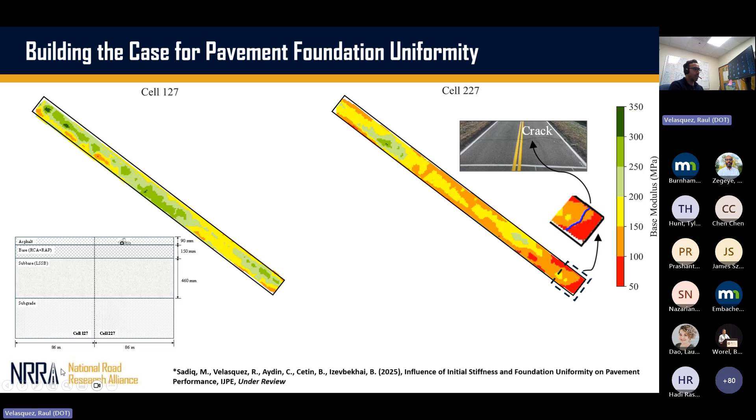So we're going to keep connecting the dots. We're going to keep monitoring these cells. Fortunately, thanks to MnROAD operations, we have consistently measured when we can. We have been mapping the foundations of all the cells with the help of Ingios, with the help of UTEP with Soheil. We have been collaborating with some of our members on this effort. So I just want to show you why this topic is important. And with that, I'm going to give the floor to either Tom Yu or David White to talk about their solicitation in this pooled fund.

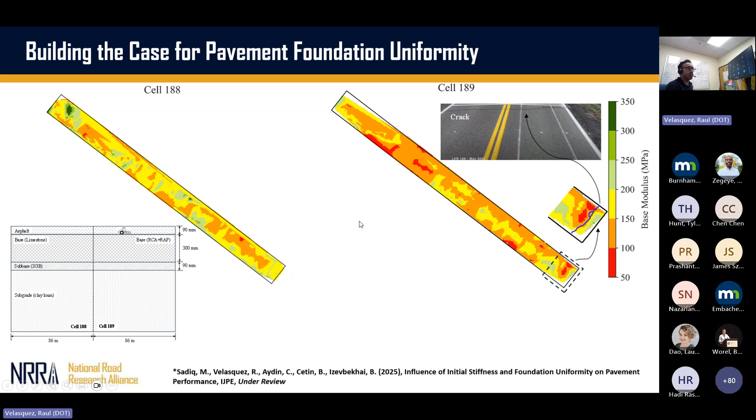Dave, are you on the line? Good morning. I am. Let's see, is Tom on? I didn't see him, so yeah. Okay. I have the slides for him. If you want, I can navigate the slides. Perfect. So I'm gonna show it here. All right. Okay, great. Thank you.

I'll walk through these slides on the proposed pooled fund, engineering the foundation layers for long life, low carbon pavement systems. And what a great background picture to warm us up this time of the year. I'm not sure the story behind that, but that comes from Tom. Okay, thank you. The solicitation has been posted. I'll go ahead and put that in the chat. The champion for this is Chris Brakke with Iowa DOT.

And the manifestation of this really comes from 3 years of workshops at TRB and the work at MnROAD and other agencies that are focused on pavement foundation construction. The objectives are to demonstrate intelligent construction technology for ensuring quality of pavement foundation construction with 100% modulus verification,

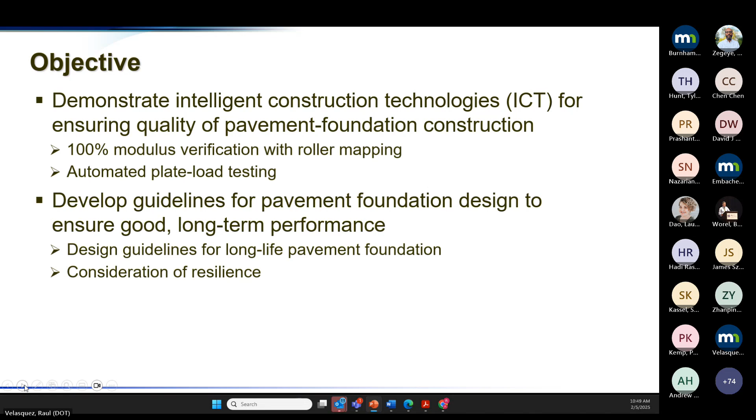The proposed project activities involve technology demonstration from demonstration projects using 100% mapping and in situ tests for validation. Technical support will be provided for the pilot project. So it's envisioned that each participating state would have the opportunity to build a section of roadway as part of the demonstration. Establish processes for quality assurance and verification, including draft specifications, and then develop guidelines for pavement foundation design.

The last 3 years at TRB workshops have been an important discussion where new tools are needed to design pavement foundations to meet pavement design requirements. So establish best practices. And if you've heard Tom talk about this study, deterioration, durability over time is very important to him as part of the project. And it's envisioned geotextiles and different types of stabilization would be an important part of the design element. And then addressing resiliency.

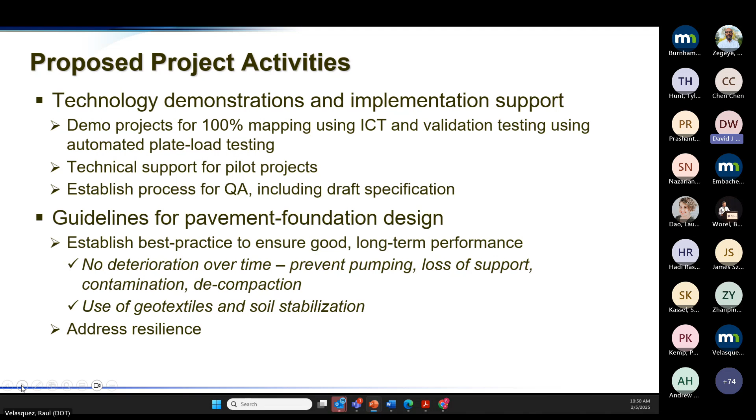The proposed study is 5 years, anticipating up to 3 pilot projects per year, and they're seeking 10 state highway authorities for commitments. The funding level is $30,000 per year for 5 years, starting in 2026. And Tom can speak more to the commitment that he's working on from the FHWA side.

All right, just going back to the study objectives, Tom mentioned that environmental sustainability and reducing the carbon footprint from concrete mixtures was the primary motivation behind this project. And even if you look at the PCA's 2050 roadmap, you will see that alternative cements are one strategy that's been proposed in the pathway to net zero, right? So this project is essentially doing that.

And the objectives of the project were to determine the characteristics that we need to be considering while selecting and placing these materials. What do we need to be thinking about when designing these materials? And more importantly, when producing and placing these materials in the field, what are some of the key aspects to consider? And a lot of these materials are unique.

So if you look at an alternative cement, it's no different from any other cementitious material that you would use, but as defined in the ACI standard, it is an inorganic cement that can be used for either a partial replacement or even a complete replacement of Portland cement in your mixtures. Right? And specifically, these cements are not necessarily covered by applicable specifications or standards that are in place for Portland or blended cement. So those are the materials we're looking at.

So as I mentioned earlier, quantifying environmental impacts, looking at the carbon footprints and comparing that to traditional paving mixtures, that was a big component of the study. And more importantly, we want these materials to perform either equivalent or even exhibit better performance to the materials that we've been traditionally using. So performance is central to it. That's why we have a long-term monitoring aspect in this particular study.

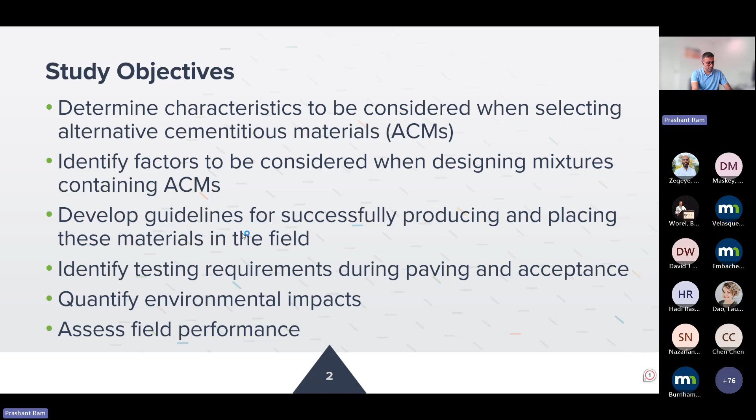So looking at the work tasks, we had 9 original work tasks that were defined as a part of this project. The first initial task was to just conduct a literature review on the different types of alternative cements out there. And then task 2 was mostly construction testing analysis. A lot of testing was performed in the laboratory to test these mixtures, and all the results of those tests have been documented, and those reports should be available on the project webpage on the MnROAD site if you search for it. And then we looked at constructability evaluation, right? How feasible is it to use these materials on a large scale?

So one of the requirements of this particular project was that we should not need the use of any specialized construction equipment. We needed to use the slip form paver and also all other equipment that have been traditionally used with slip form concrete paving. So no modifications were performed to the production operation and also the paving operations.

And then tasks 4, 5, and 6 mainly deal with the performance update after year 1. What did we find, not just from visual inspections, but also from the testing that was conducted at MnROAD and also the data that was collected from the embedded sensors. And task 5 and 6, the same thing for years 2 and 3. And task 7 is looking at the sustainability evaluation. I'll talk about that briefly, but that's something that is underway, and that's in the next steps.

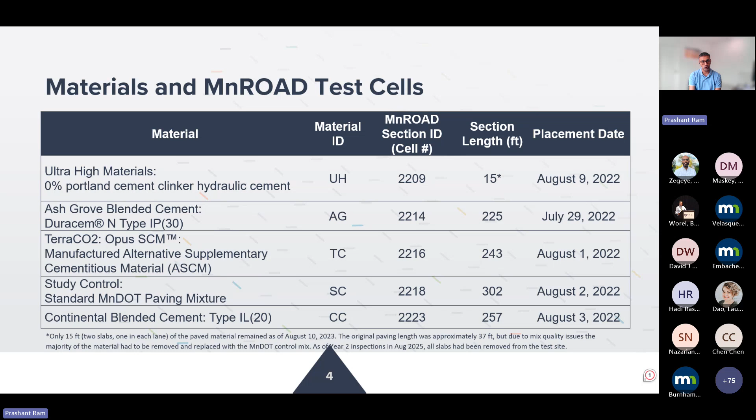All right, looking at after 2 years, how did these test cells perform? So one thing that we noted right after construction was that we saw some recurring distresses in almost every single test cell, approximately a foot from the outside shoulder line. And we saw that it was more severe on the approach side than the leave side.

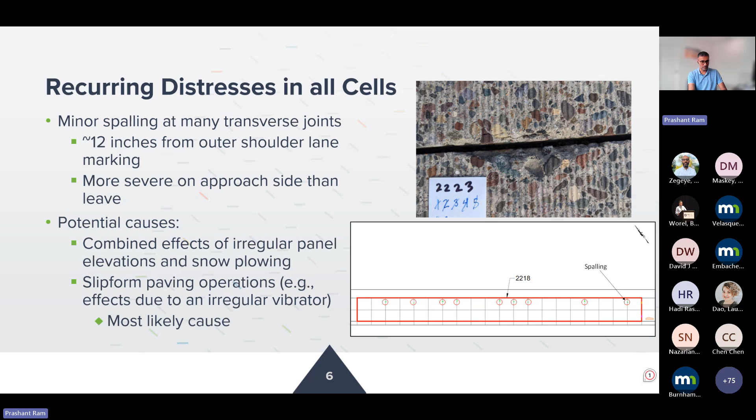So the possible causes we thought could be combined effects of irregular panel elevations or snow plowing, but we did get a straight edge out there in the field during our year one site inspections, and we did not notice anything out of the ordinary in terms of elevations. We thought snow plowing could be an issue, but it really didn't look like that would be the major cause. What we hypothesize is the most likely cause is probably the slip form paving operation. It could be an effect from an irregular vibrator. And we saw that on almost every single joint. It was probably more pronounced on certain joints, and we saw this distress actually progress as a part of year two inspections.

And just a quick drone footage that we took as a part of year one site visit. So you could see these joints there, approximately a foot from the outside shoulder. Almost every single joint you can see that there's spalling there, and in some joints where you don't see the spalling, you would see kind of a fraying along the joints there. So this was pretty much widespread, not just isolated to one particular mixture or material type. It was almost widespread through every single test cell on all the three projects that were implemented back in 2022.

And other general observations from our year two site visit, we did see some additional damage, some new additional distress progression, both in the longitudinal and the transverse joints. We did see progression of the joint and corner deterioration. The spalling in some cases had deteriorated further. And as you can see, an example of one of those spalled joints there. You could see some debris also within the joints, and it could be from a combined effect of the initial damage from the joint sawing operations. I think the timing of the joint sawing operations could have been potentially challenging for the contractor out there.

And also the other thing is progression of the damage, probably due to inadequate application of the curing compound. And also the one other thing that is often overlooked is after the joint sawing has been performed, the reapplication of the curing compound on the joint is not necessarily performed in a lot of cases. So that could also have resulted in compromised joints, and this could result in further deterioration that we could see in future years.

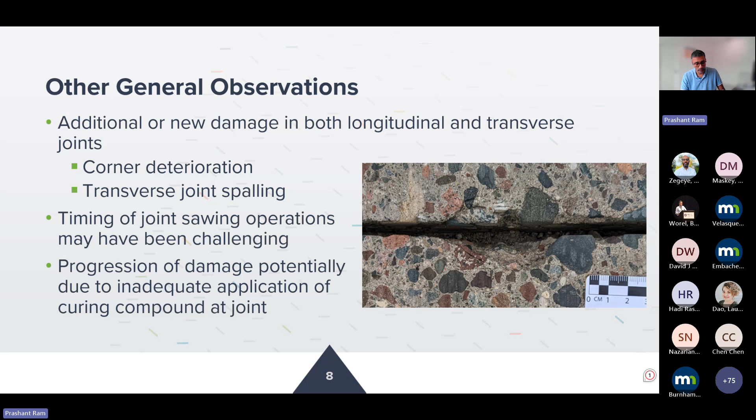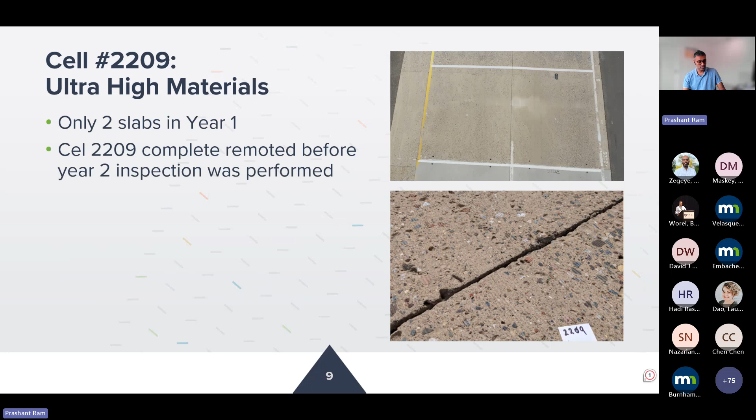And this is cell 2209. Like I said, after year one, only 2 slabs remained. And then these slabs have been completely removed prior to the year two inspection, so we do not have this material on site anymore.

And cell 2214, this is your Ash Grove blended cement, the cement that had 35% of the calcined clay. We did see the joint spalling issues. Some of those joint and corner spalls had progressed to further severity, some medium, maybe 1 or 2 high severity spalling locations, as you can see from the photos there. And a few areas of isolated pop-outs, not over the entire surface, but isolated pop-outs of larger rock.

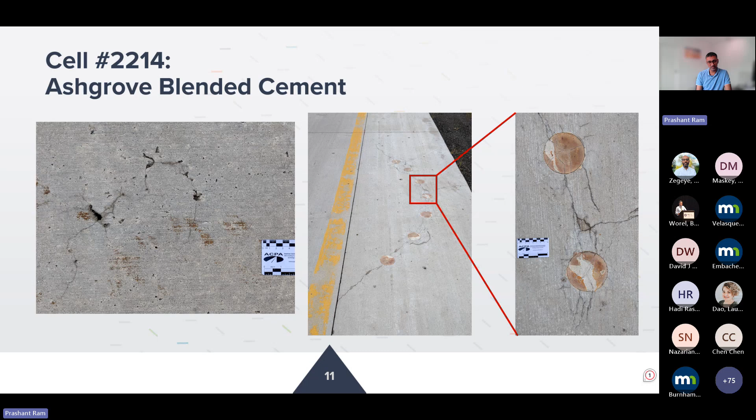We did note 1 or 2 areas of what we called initially shrinkage cracking, and a lot of it has not progressed much. A little bit of progression that we saw after year two, and there was one area along the shoulder where we saw a pattern of parallel cracks, probably due to a moisture differential in the near surfaces of concrete, maybe due to over finishing. It looks like MnDOT did take some cores there. We have not seen data from those cores, but this could very well be due to moisture issues. This was only localized to 1 or 2 particular slabs in the shoulder area, not widespread throughout the section.

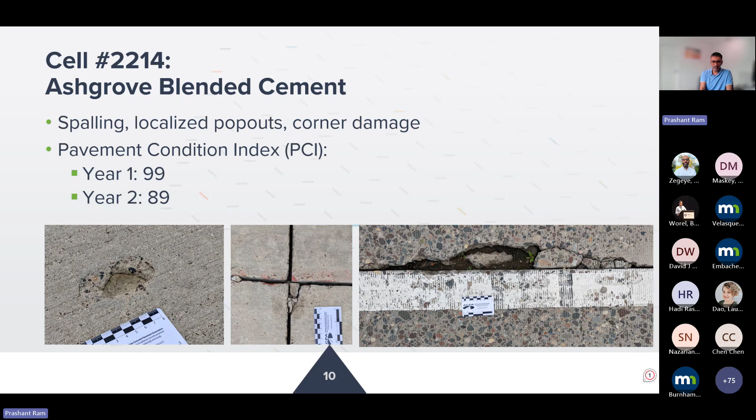Our next material, Terra CO2, this is the manufactured fly ash, they call it the Opus SCM. One item I overlooked earlier: when we looked at the Ash Grove cement in year one, the pavement condition index according to the ASTM standard was 99, and then in year two we saw a big drop, almost a 10-point drop, primarily due to the progression of distresses into the medium severity and some to high severity.

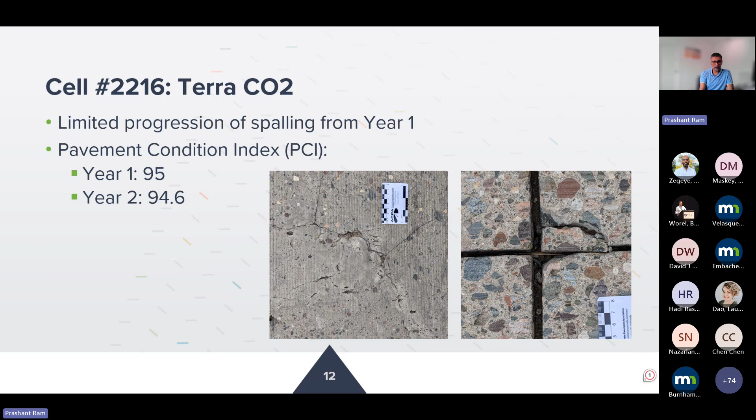The next material, cell 2223, was the continental cement, the type 1L20 blended cement. Again, not much progression in distresses, but you can see some debris within those joints from those corner spalls. We expect to see a little more damage in future years. We also saw some emerging distresses, as you can see from the picture on the right. Again, you see some joint misalignment there, and also some damage emerging on the corner, so we can see maybe in year 3 and 4 we could see some more corner spalls develop in this section.

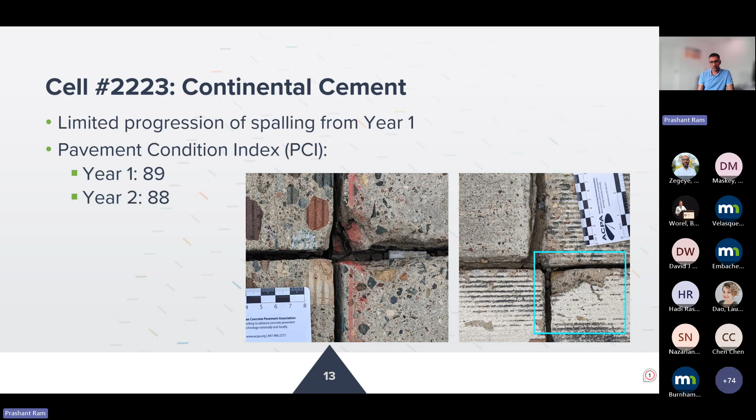Again, when we look at the pavement condition index, year one was at an 89. Year two, not much of a drop, as I said, not much progression in distresses from year 1 to 2. And then cell 2218 was our study control, your standard MnDOT paving mixture.

When we went out there for the year one inspections, we did see some irregular surface wear on certain slabs, and that had continued to exhibit further deterioration. You can see a little more scaling of the paste, which has come out in certain locations where we noted some irregular surface wear in year one. In terms of pavement condition index, it still seems to be performing very similar to what we saw in year one.

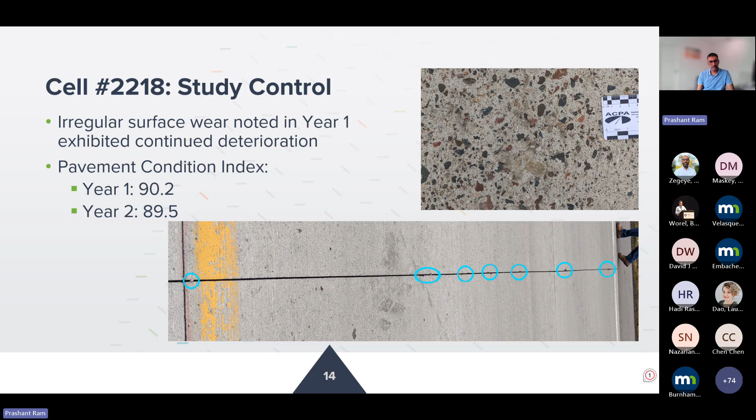And we do see some joints where there's a lot of fraying along the joints, not necessarily progressed to the condition where you would actually document it as a distress according to the ASTM standard, but we do see some fraying and some incompressibles lodged in those joints that could potentially result in further joint deterioration in future years.

Taking a quick look at some of the data collected at MnDOT, this is the ride quality data collected using two different equipment. One was the LISA device on the left side of the screen, and on the right side is the automated data collection equipment from the Pathways van. As you can see, most of the data falls in the good range as far as IRI is concerned.

We did see a little bit of a drop from years 1 to 2 in the IRI, but one thing to keep in mind is these are pretty short test cells, about 250-foot test cells, so it's not so much the absolute value that matters. What we're really interested in is how these values progress over time. We did see a little bit of a drop, but not too significant.

One notable observation was that cell 2214, the ash grove, exhibited typically higher IRI values in the 80 to 100 range when compared to the other materials, which were slightly lower, between 60 and 80.

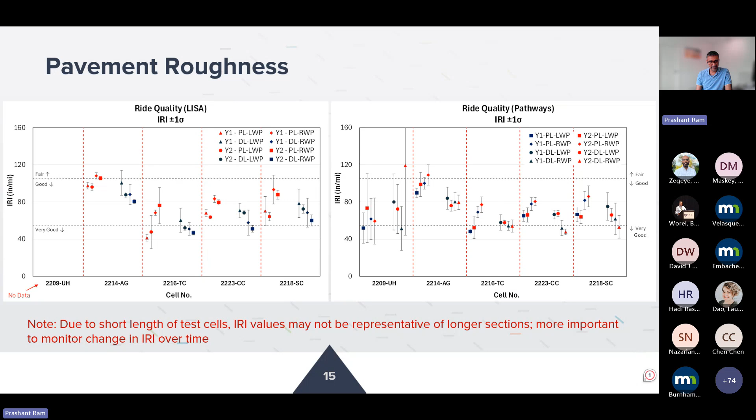In terms of surface friction, the ribbed tire numbers, as you can see on the left side of the screen, most values were over 40-45, between around 48 to the 60 range. As expected, the smooth tires gave slightly lower values, but we did see a bigger drop from years 1 to 2 in terms of friction with the smooth tire testing at 40 miles per hour.

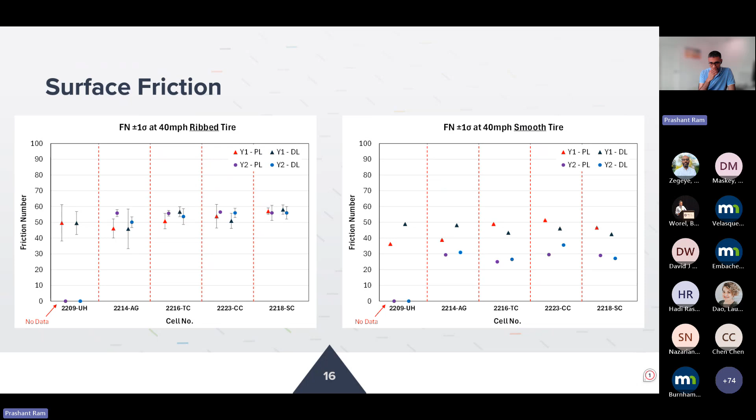For load transfer efficiency, nothing noteworthy between years 1 and 2. It seems relatively consistent, about 80 to 90% in terms of load transfer efficiency from the approach and leave slabs. Not much different in the driving and passing lanes, and no significant difference when we looked at years 1 and 2 data.

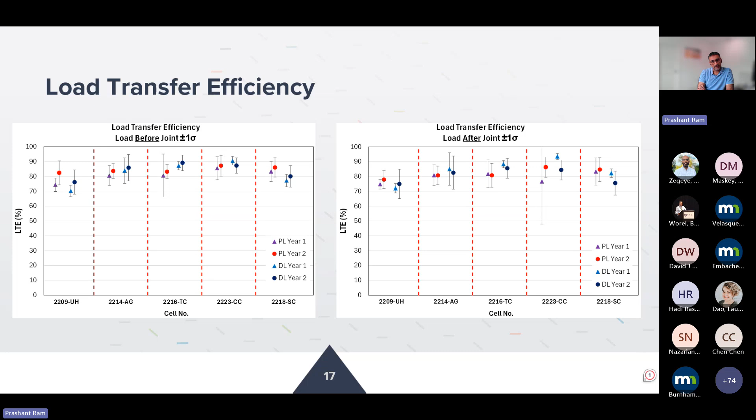In addition to these tests at MnDOT, as you know, with testing at MnDOT it's not just the kitchen sink they throw at it, they throw the entire kitchen. So we had almost every single conceivable sensor on the market used in these test cells, and there's a report documenting what sensors were used and where they were placed.

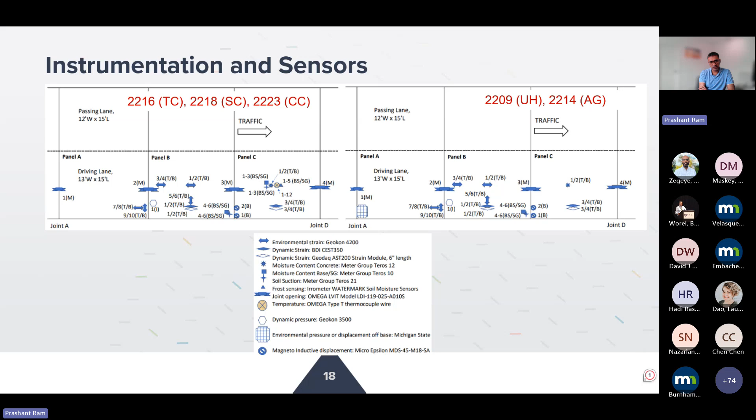I'm not going to go through all the details, but a little bit of data from those embedded sensors. This shows data from the thermocouples, which were placed at different depths. Some of the darker lines, the darker blue and almost black lines, are data from the embedded sensors that were deeper down in the structure, and there's not much noise from those as you'd expect. The ones closer to the surface, shown in red, exhibit more temperature cycling and a lot more noise.

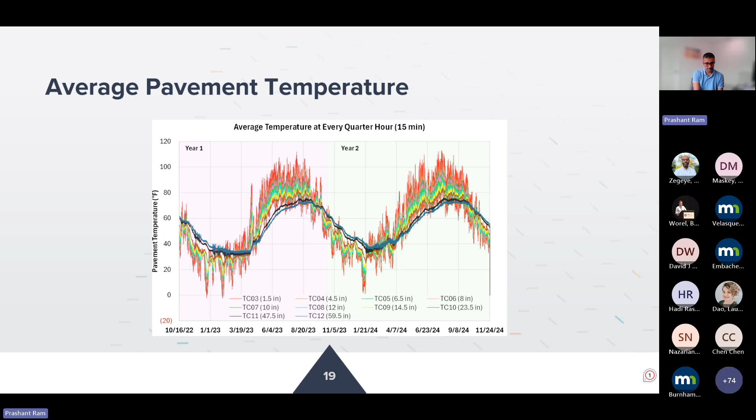This data is being collected continuously, and here's some example data from cell 2214, the ash grove test cell - this is the vibrating wire strain gauge data. Again, as mentioned earlier, we're not focused on the absolute value, we're trying to look at trends over time. This data has been looked at for all the test cells, and nothing is out of the ordinary - just the expected cycling you'd see from these sensors.

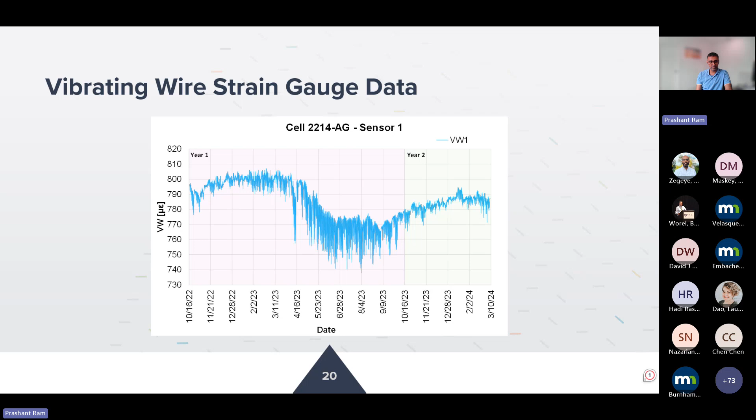We will continue to monitor this over time. If there is cracking or pressure relief, we would expect to see an abrupt drop there. But so far, none of the test cells have actually exhibited any mid-panel cracking. There was one right after construction, but that had already been replaced, and we have seen no panel cracking at the end of year 2 in any of the slabs.

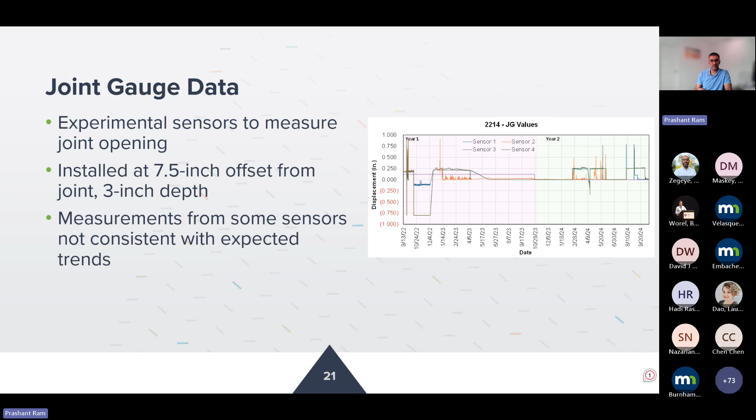Another experimental sensor was used to measure joint opening. This was installed at a 7.5-inch offset from the joint and at a 3-inch depth from the surface. In some cases, the measurements we saw are not really consistent with expected trends, but again, this is an experimental sensor. We are monitoring this data over time, and we'll report the trends over the years as we collect more data.

So, to quickly look at the performance of these test cells after year 2, what did we find?

The most common distress, as you've seen from the photos there, would be joint and corner spalling. We have noticed some progression in spalling and a little bit of additional distresses that have manifested that we saw in year 2.

Cell 2209, the ultra-high materials with 0% Portland cement, has been completely removed from the test site. In terms of ride quality, most were in the good ride quality zone. The only exception was cell 2214, Ash Grove, with 35% calcine clay, which exhibited slightly higher roughness in the 80 to 100 inches per mile range compared to other test cells.

In terms of friction, nothing out of the ordinary. The smooth tire friction numbers were consistently lower in year 2, and the load transfer efficiency values were mostly similar to year 1. Nothing to say there were significant differences.

That's it for the year 2 monitoring. Next steps, we will be doing year 3 monitoring. As you heard earlier from Ben, we're planning on doing some additional construction starting in April, so we might try to get out there early to look at year 3 condition data.

We're also going to be using some video surveys to supplement field surveys for years 3 and 4, if you're unable to get out there in the field.

In terms of sustainability evaluation, we have surveyed the material producers to see if they had any information on carbon footprint from these materials. Again, not much was available in terms of environmental impacts or published environmental product declarations, but we are in touch with the manufacturers to obtain any environmental data that we can.

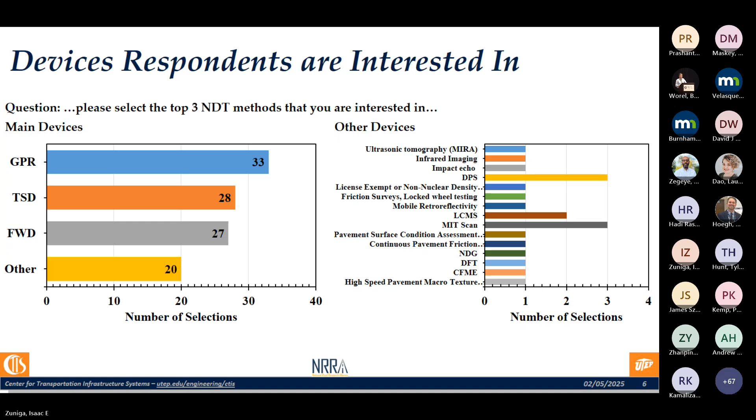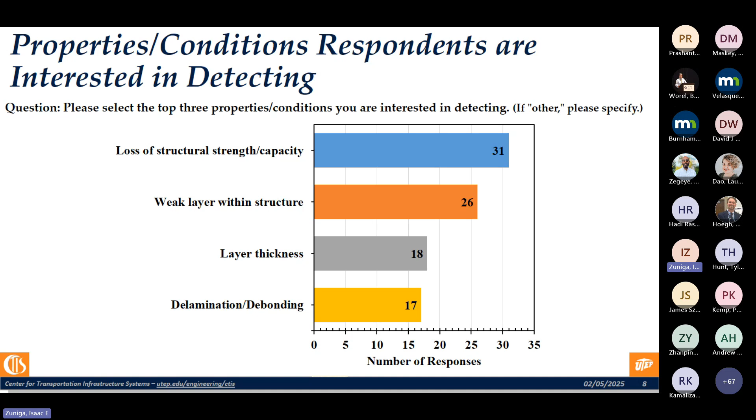And so with the three devices, FWD, GPR, and TSD, they were asked to provide any strengths, concerns, and limitations the device had. And so these were open-ended questions to remove any bias and allow respondents to provide whatever they think the best strengths, limitations, or concerns are of each device. So I purposely chose GPR FWD just because of the overwhelming response in those selections.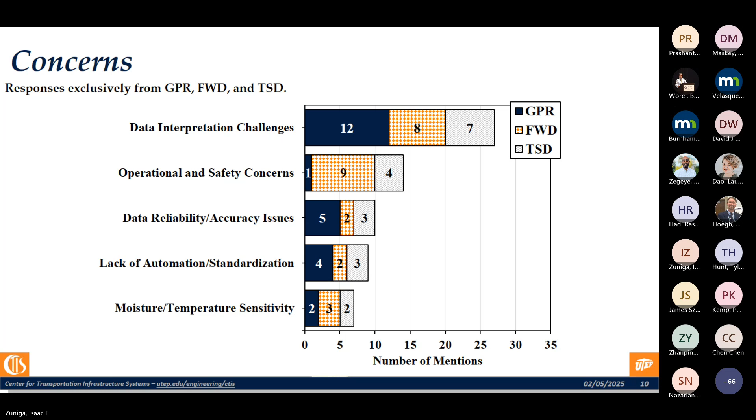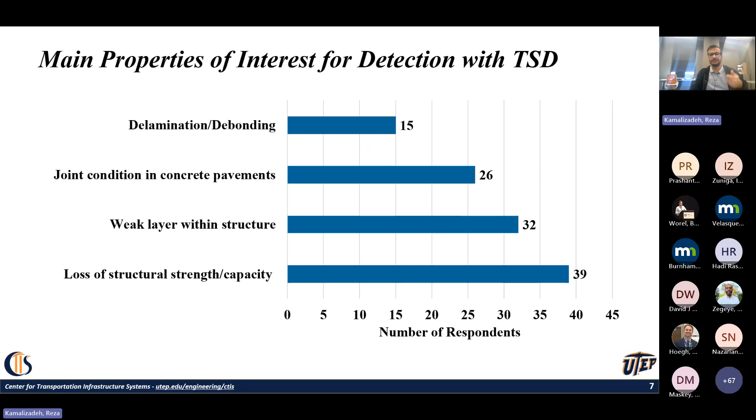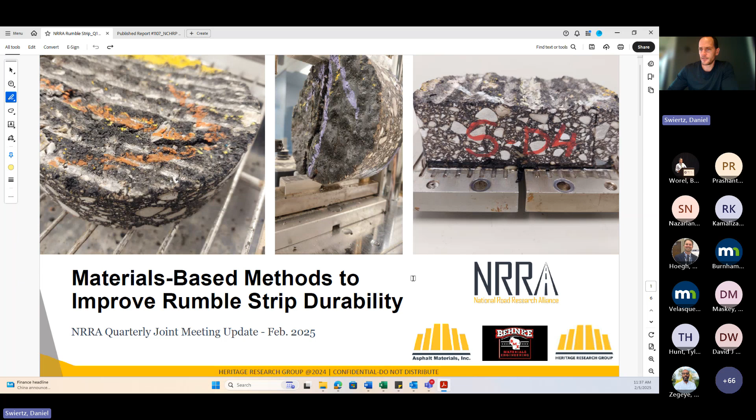This project's a joint effort between the Flex and preservation teams. Tyler's obviously the liaison for it. And as the name suggests, what we're studying is rumble strip durability, specifically centerline rumble strip durability. As these photos would indicate, this is all done on road cores. These were projects that were built in 2023, cored, and then tested in the laboratory. So getting into the objectives, very basically, understand whether the installation of rumble strips impacts joint performance directly, or whether they set up the joint for accelerated failure. We might call that something like durability in our industry.

Secondly, whether there's damage that occurs or not, can material type treatments offset this damage or increase reliability of joint performance? The third objective listed here is really a safeguard against inhibiting the purpose of a rumble strip, which is as a safety tool. For that, I'll point you to NCHRP Report 1107, which came out in 2024. It does a great job of quantifying what it means for a rumble strip to be safe. And we actually hired those folks as a subcontractor on this project to evaluate noise performance.

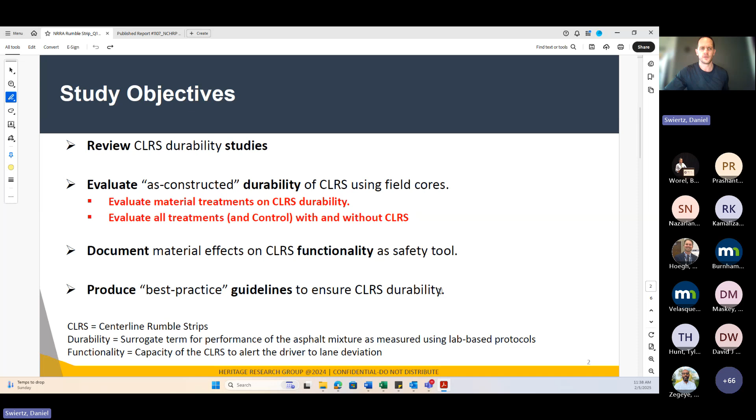And then lastly, not the point here, is to develop sort of best practice guidelines. So different scenarios, design scenarios, reliability scenarios, what kind of treatment options would an agency have when they're building a longitudinal joint?

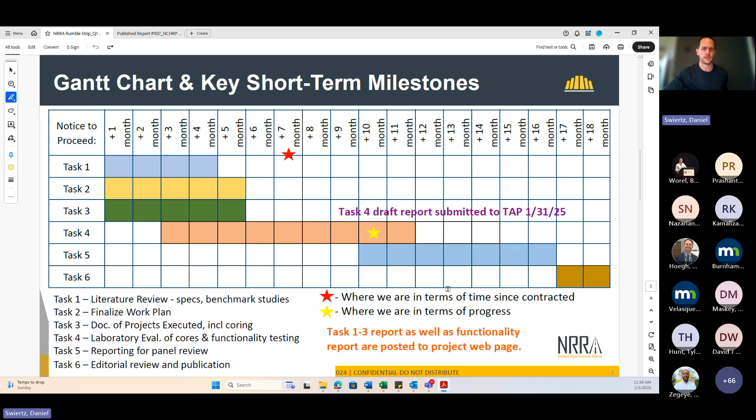Very quickly, the takeaway here, I'm going to point you to the NRRA website for this project. Lauren does a great job keeping that updated for us. All the task reports and data and slide decks and so forth are posted there. All this Gantt chart is to say that we're a little ahead of schedule, but we've submitted now the meat and potatoes of the project. It's a matter of review and then finalizing a report and best practices, not to be taken lightly, but the bulk of the actual labor part of it is all done. So that's where we stand with this project.

I'd be remiss given this group not to show some data at least. So this slide basically gives an example of how we presented the data, but it's also one of the more significant findings. Again, keep in mind this is all on road cores, with all of their flaws, namely variability in construction and materials and so forth. But what you're looking at here, for those of you familiar with asphalt mixture testing, this is data from an overlay tester.

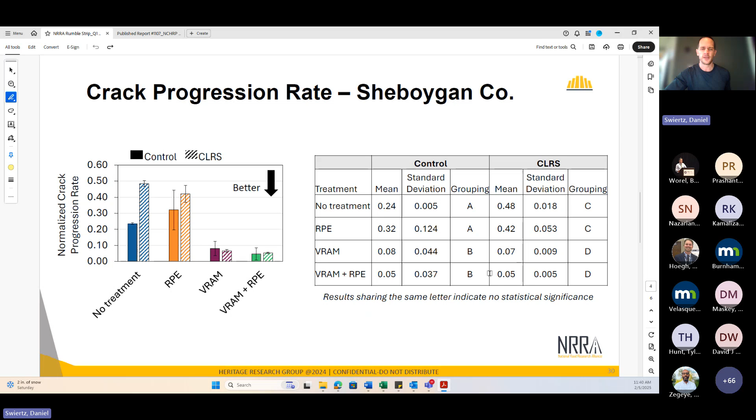The overlay tester gives you two parameters. One is fracture energy, less important for a longitudinal joint, but the other is crack progression rate. So this is how quickly the crack grows with subsequent strain events. So it's like a fatigue type test, which does make sense for a joint. And what this is showing, using a statistical grouping analysis, is that the installation of rumble strips actually does, statistically anyway, increase the crack progression rate at the joint, and that material treatments to varying degrees of success can offset that. So again, just one snapshot of the several test methods that we used, showing how we went about answering our objectives.

So with that in mind, to come back to the objectives: does the installation of centerline rumble strips for these project scenarios impact joint durability? The answer is yes, but the short-term impacts at least are overshadowed by the presence of the joint itself. My friend Raul at the beginning of this meeting used the word discontinuity, and I think there's probably not a better word for a cold construction joint in hot mix. So the presence of that discontinuity is really what controls the performance, not the rumble strip itself. In other words, build a good quality joint, and installing rumble strips is probably not the boogeyman that some may believe.

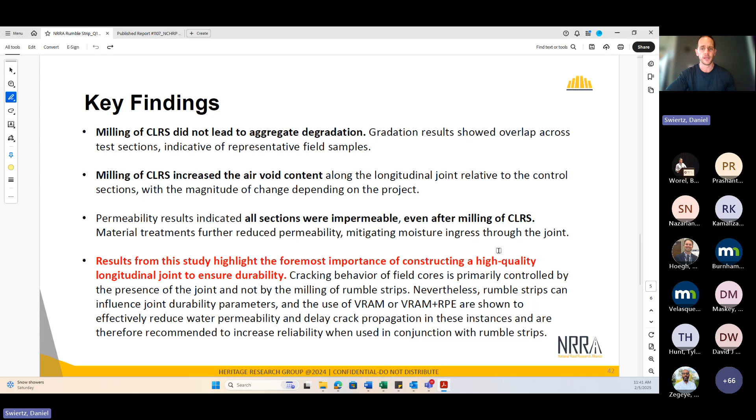But keep in mind that this is all short-term performance. We had significant issues with trying to age these field cores and evaluate long-term. In the hot mix industry, durability is generally discussed in the context of long-term. So what we found is that a lot of these trends are project-specific, even material-specific to a certain project. So investigating longer-term durability is probably in our best interest. We talked within our TAP about submitting an idea to use these projects. They're already built; as of 2025 that'd be 3 years. So by the time something would get contracted, 4 or 5 years of service, it might be a good idea to go back and see if any of these trends hold up.

But again, I wanted to be brief to keep us on track. The project website's a good resource. Tyler or myself can answer questions. But that's what we're learning on centerline rumble strips, and hopefully more to come in the future. So Tyler, I'll turn it back over to you. That's what I've got for you this morning.

Thanks a lot, Dan. Ben, since we have about 18 minutes left or so, do you want us to just wait on questions till the end? Yeah, just hold off if we have time. Okay. Dan, you did a great job explaining what's happening, and people can contact you. Sounds good, we'll leave it at that. Kurt, you want to bring us home with the flexible team and the project you're highlighting with Chen Chen?

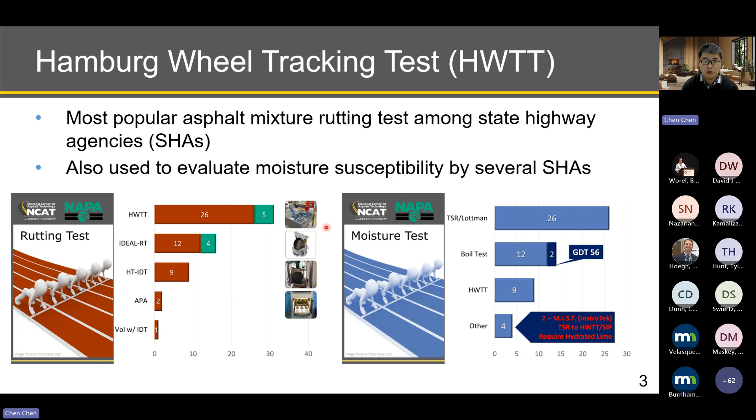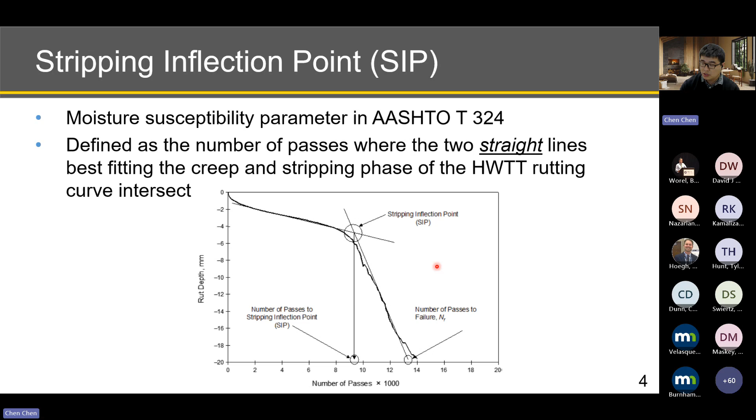And SIP, which means stripping inflection point, is a parameter developed in AASHTO T324, which is used to indicate moisture susceptibility. As you can see in the figure, SIP is the intersection of two lines. This line is called the strip line. This line is called the creep line. So even though the standard clearly says SIP is the intersection of these two lines, there's no standard method to calculate these two lines. So some people just use their eyeball to draw two lines and get the SIP number.

So the challenge for SIP is we cannot accurately calculate SIP, especially for Hamburg samples which have a little bit of stripping. Some people may say from the eyeball there's no stripping. Some people say there's stripping. So there's always confusion or dispute between different people, and there may be a dispute between agency and contractors. And another thing I mentioned earlier is there are so many different methods available.

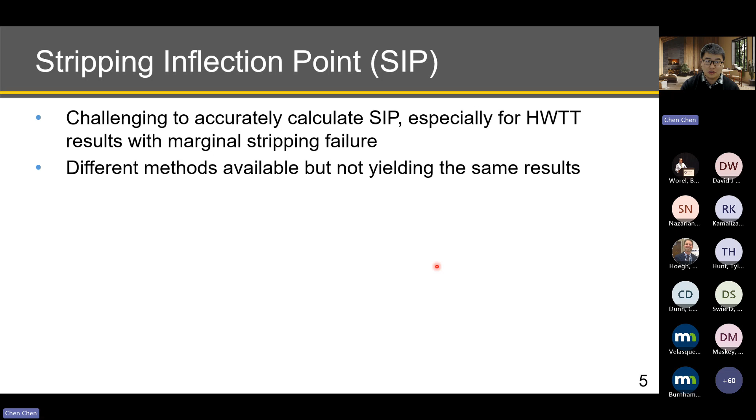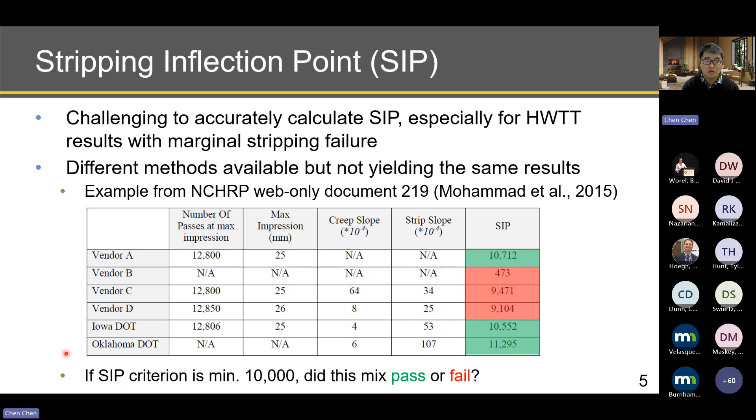So if the state SIP criteria is a minimum of 10,000, the mix could pass or fail. That's a tough question for agencies, and also a tough question for contractors. So this means we need a standard method to calculate SIP to avoid disputes among agencies, or between agencies and contractors.

So after we standardize the method, we would like to develop a Hamburg data analysis software, which will make our life easier. You just upload the raw file and get the final results. This way we can avoid subjective data manipulation and interpretation.

Some people, from the raw data, may select different data sets to do the analysis. But if we use software, you just upload the file and you cannot change the raw data. You just need to upload the raw file and the software will give you everything. This way it will make our life easier and also avoid disputes between agencies and contractors.

The first task we did for this project is we collected information. We did a survey among agencies and Hamburg manufacturers to summarize existing methods to calculate SIP. We have 7 methods, but not all of them always give comparable results.

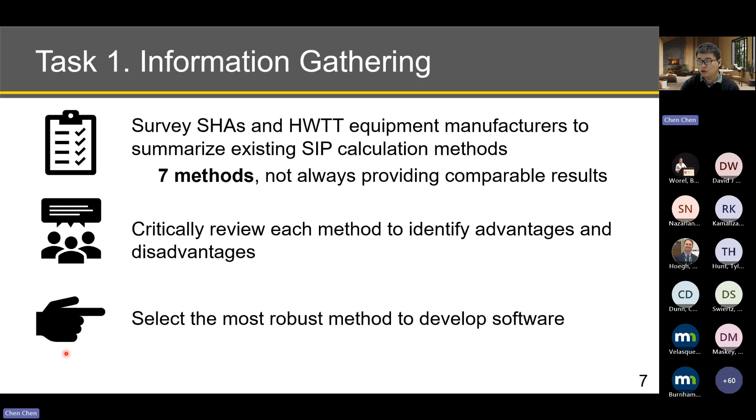So the team and the panel worked together to critically review each method to identify the pros and cons for each, and then finally we selected the most robust method to develop the software.

Here is a quick summary about the selected SIP method. Basically, long story short, we use the Francken model to fit the raw data. Then, based on the fit, we use the fit equation to define the stripping point, to define the stripping line and creep line. As I mentioned earlier, the difficult thing is we know we need 2 lines to get the intersection to get SIP, but what's the standard way to define these 2 lines?

So after you have the equation, we have a standard way to define the creep line and strip line, and you will have the SIP number. You are more than welcome to review our report. There you will be able to see how other people use different methods and how they compare to each other.

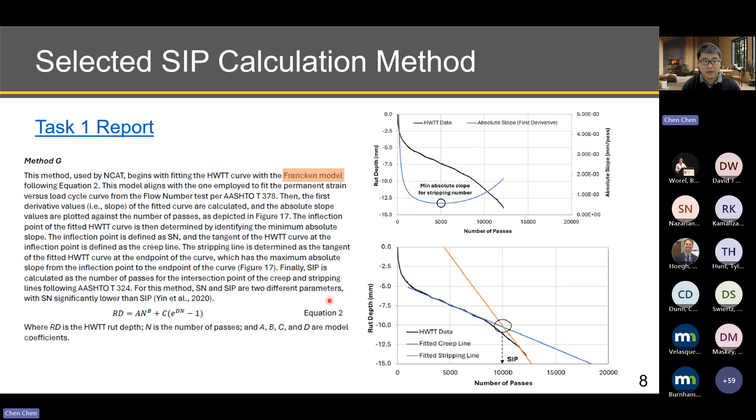After we fit the data and do the analysis, there are a bunch of test parameters available, the actual parameters defined in the standard. There are so many parameters here. From our study a few years ago, we also have some additional parameters like stripping number and corrected rut depth. The stripping number means the point from which the mixture starts to strip, to have stripping issues.

The corrected rut depth means, people may be curious, if there's no stripping happening, what's the final rut depth? Because the Hamburg Wheel Tracking test is run underwater. If there's no stripping, the curve will only show the rutting resistance. But if there's stripping, the final rut depth is a combined parameter from rutting and stripping.

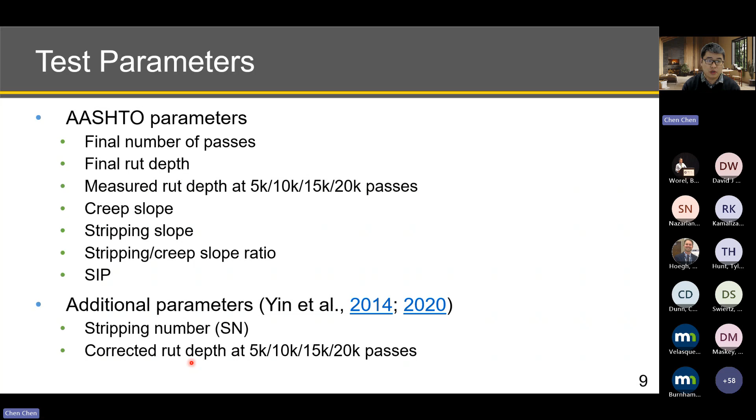So the corrected rut depth can give us a straightforward meaning about what can help us separate rutting and stripping, so if there's no stripping, what the rut depth would be.

The creep slope and corrected rut depth are pure rutting parameters, while the stripping slope, SIP and SN number are pure moisture parameters, and the remaining are combined parameters, meaning they are affected by both rutting and moisture.

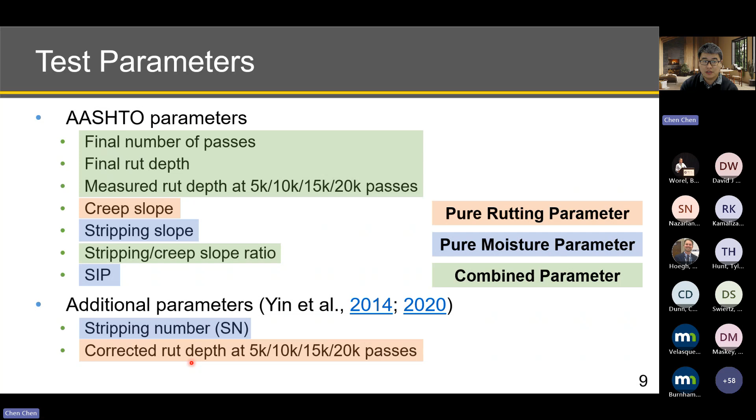The next task, after we selected the method, is we went ahead to develop our software. The software is a web-based program on the Open University server, and the logo is still under development. It's almost there, and we are happy to have 3 manufacturers supporting us: Geotech, PTR, and Troxler.

And we have 4 files. Besides the 3 files from the 3 manufacturers, we also created 1 additional file format, meaning people can create their own file using a single Excel sheet. So if you don't want to upload the raw file, you can just copy the data you want to analyze and upload it.

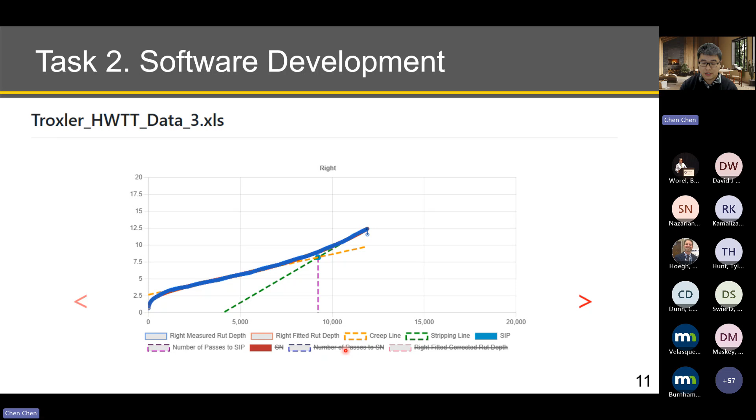In that case, you may want to do data analysis yourself to separate the left and right. Then you can just click export to PDF, which gives you an official PDF report. So basically it's very simple: upload the file, then export to PDF, that's all.

Next task, maybe sometime next month, we are going to distribute the software to the agency for beta testing. We'll conduct a web meeting to collect feedback, and based on that feedback, we'll further improve the software. The last task will be releasing the software for public use, developing final reports to summarize our research efforts, and conducting an NRRA payoff webinar to introduce the software user manual and other findings from the project. And that's all.

I think I got it perfectly. One minute left. Yeah, Chen, you're great. Thank you. Thomas had a question, but could you take a look at the chat and maybe touch upon that a little bit? And Kurt, if I may, I'm going to wrap us up so we can get going.